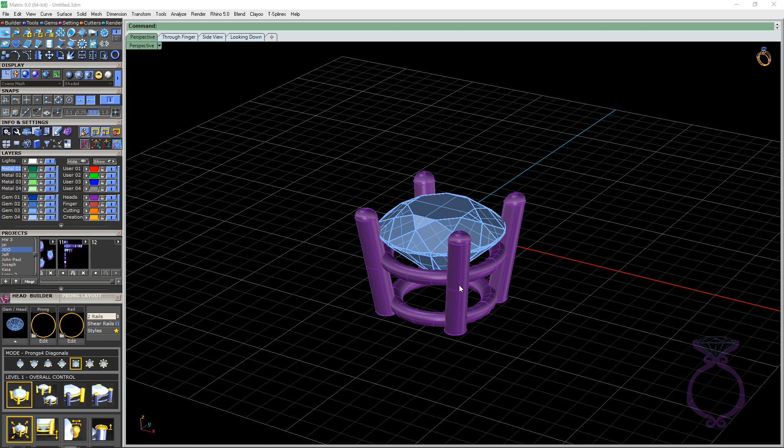So you can see here, part 3, we are going to start talking about head builder. So I've got my 1 carat, and this is basically what the program builds you right away. So if I just go ahead and delete it, and again, I'm going to select the stone, tap F6, and come down to head builder.

Here we go. Now, when we first started developing Matrix, and yes, I was part of the Gemvision team back in 1999, we worked on it for a solid year before we could sell it. So when we first developed Matrix, the programmers always had the prongs or claws come out at 0.6 millimeter. Didn't matter what size of gemstones we had, it always came out at 0.6. And then Gemvision started having roundtable discussions where customers came for a weekend. We showed you what we were working on, and we listened to you and got feedback on what you wanted.

And one of the feedbacks is there's a lot of us that have never worked on the bench that are using Matrix, and we're not quite sure what the thicknesses need to be. So can we increase it? So if it's a larger stone, make them larger. So again, those roundtable discussions were really great back in the day.

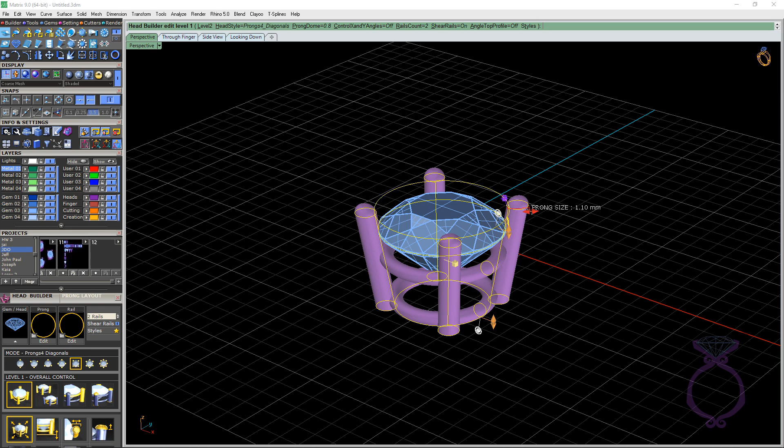So you'll notice here with this 1 carat stone, we've got 1.1 millimeters thickness, and that's a good thickness. And your stone will definitely be secure with that. If you want to make it thinner, by all means you can, but again, just be mindful. You want to make sure that the stone is going to be secure and not fall out. And if you do have clients that are insisting on it being finer, who's going to pay for that stone when it falls out?

And the other thing too with CAD is even my retail customers, they see this looks like the Empire State Building. And if you take out a ruler right now and look at 1 millimeter, it isn't that thick, but it looks heavy here. So again, you're going to have to stress to your clients, this is CAD. It looks larger than it actually is. I mean, there is an option. Let me just press enter. There is an option in view. Sorry about that. So there is an option in view, and it is the zoom 1:1.

So you can click on it. It's very easy to set this up. You actually have to go to zoom. Okay, let me just show you that. Why not while we're here? Okay, if you click on this zoom 1:1 calibrate, you go right now to your drawer and you measure this bar on your laptop or your monitor. You type it in here and hit OK. So let me just bring that back. Control Z will bring it back.

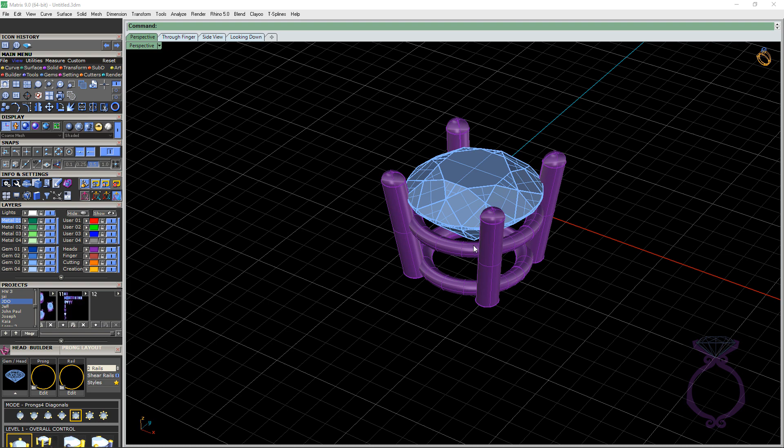So if you need to, if you're working with a client right in front of you, you could do the zoom 1:1 and go, this is how big it really is. So if you're in front of someone, they're going to go, oh, yeah, it's not as big as I thought it was going to be. So unfortunately, that's the drawback. Okay, I'll get off my soapbox here.

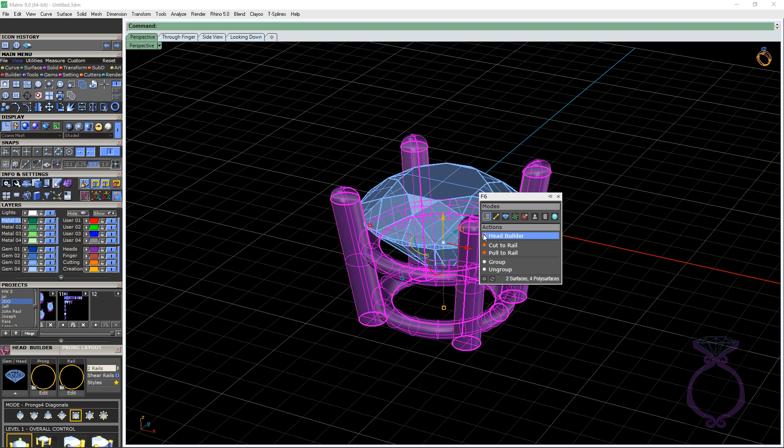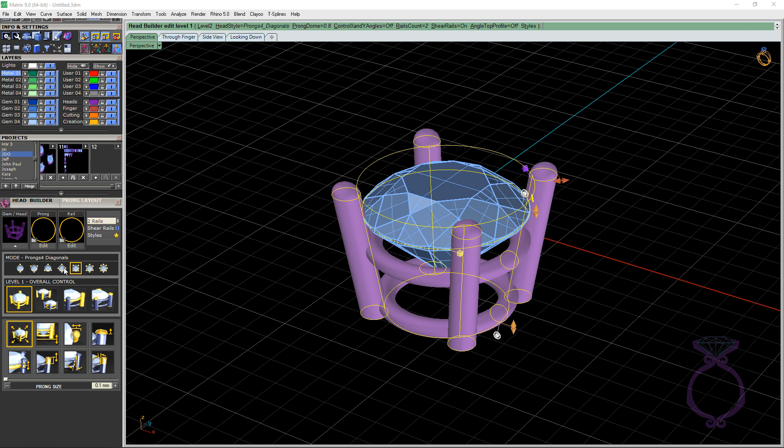So I'm selecting the head, I'm tapping F6, I'm going back to head builder so that I can get these handles to be interactive. Okay, so I'm going to explain head builder, and if you know it, then you can just zoom past this if you want. But right now we are on level 1. You can see here level 1, and there's all these handles. There's also mode, which is the number of prongs that are available with this shape of stone. So if you've got a heart shape or a marquise shape, you're not going to get as many settings. The round seems to have the most amount here.

So if you look at level 1, Danielle, our lady that did all our graphics for our buttons in Matrix, you'll notice that she's got the prongs yellow and the rails yellow, which means that whatever I touch over here, so if I grab this prong size and I increase it, notice the rails are getting increased at the same time. So everybody's working together, okay? So this is level 1.

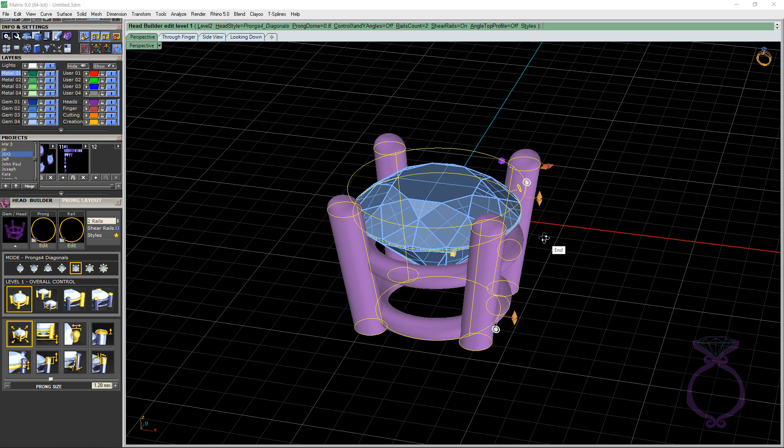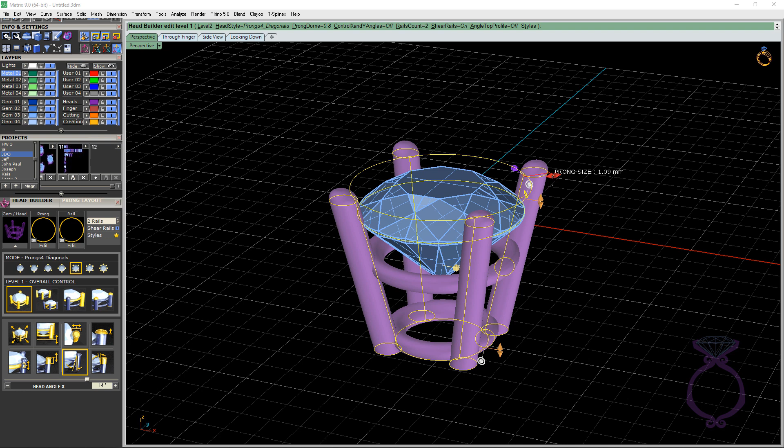Now, when I'm in level 1, depending on my client, some clients want things a little heavier, some want a little finer, but I'm not really going too much smaller than what's coming up as the default with Matrix. But I will go into the through finger viewport, and this is where I can adjust how tall this setting is and what kind of angle. Okay, so that's pretty much all I'm doing in level 1 is adjusting the prong size, adjusting the head drop, and the angle.

There's a couple other features in here. You can also use the top angle. You can pull this in. So if you want your setting to curve a little bit, that's a nice feature, and then you can pull this in. Okay, so that's with your top angle.

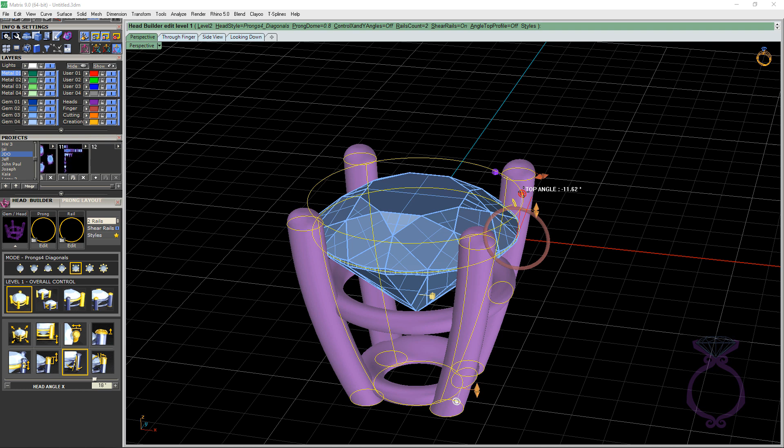Now some people want me to make these claws or prongs very tall, and it's the manufacturers. They want to make sure that I'm giving the setter enough metal to push over, because your customers can say the stone measures 6 millimeters round and whatever depth it is, but depending on the stone, the setter might need that extra metal, and after it's been cast and finished and it goes to the setter, the setter is very cranky that you haven't given them enough length.

So again, you have the option. I only have one client that wants me to make it super tall. Everyone else seems to be okay, but every once in a while you'll get a colored stone, and if you know you're dealing with a colored stone, maybe just increase that just a smidge.

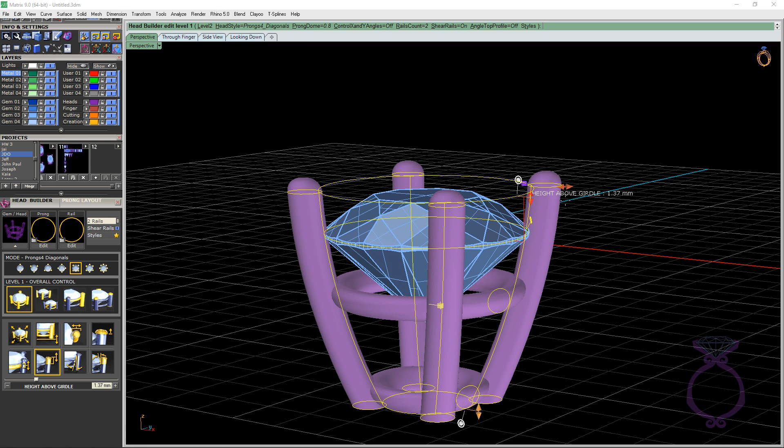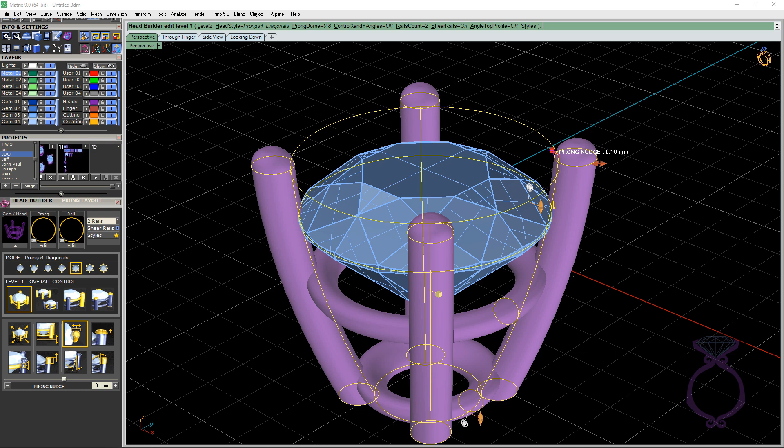There's also a prong nudge, which is 0.1. Now that is the thickness of one single sheet of paper. So if you zoom in here and you're like, oh, that's overlapping too much, remember, this is one sheet of paper. I don't ever mess with this. However, I do have clients that want me to go to 0.3. But for the most part, I don't want the setting too small, and I just leave the prong nudge the default. Okay, that's level 1.

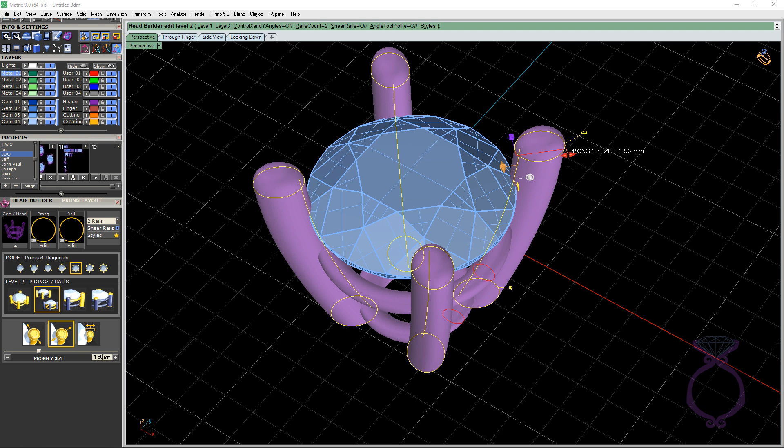Level 2, you'll notice by the picture here that the prongs are separated by the rails. So if you click on the letter P up at the top, now you have these handles. In level 1, if you took the handle and increased it, it would maintain the aspect ratio, meaning that if I scaled it out in this direction, in X it would scale out in the exact same measurement. So with level 2, if you needed to make oval prongs versus round prongs, you have that ability.

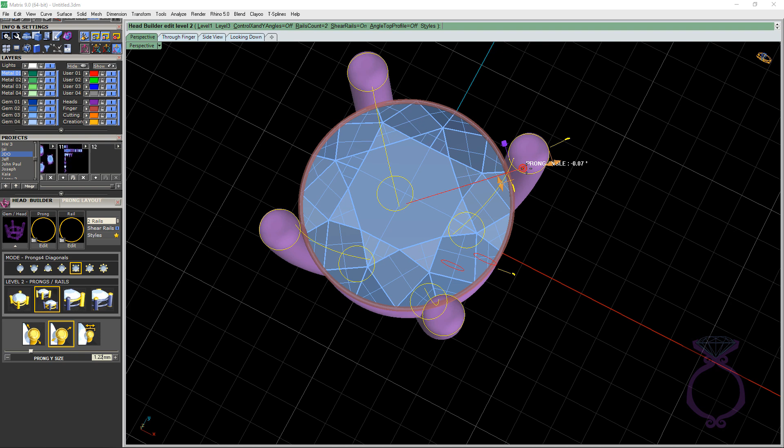The other thing in level 2 is that you can adjust the prong angle. Sometimes I've done this, especially if it's a halo. If I'm making a halo beside this and this prong is overlapping the stone on the halo, I might want to just angle it so that this is in between those two stones.

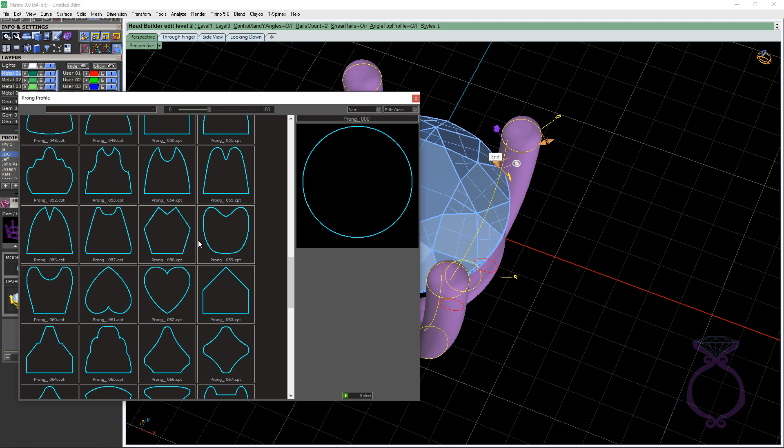There's also the prong profile, so we can go into the library here and choose a different shape of the top of our prongs. Again, the programmers kind of got out of control. They didn't factor in polishing. So unless you're making a simple solitaire and you want to make it just a little bit different, you can mess around with these different shapes. So here's the heart shape. Let's just use the heart shape here.

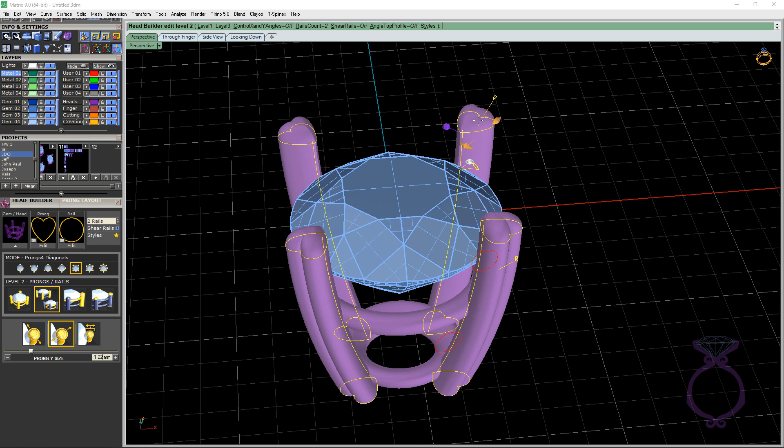The other option, which was also in level 1, is this half bezel icon. So if you click on it, your prongs end up being flat. Let's go back to the circle here. So you can see we've got a nice dome when we're using a different shape, but when we do the half bezel, it flattens it out. And then you've got this V-prong edge angle so that you can adjust the width on this.

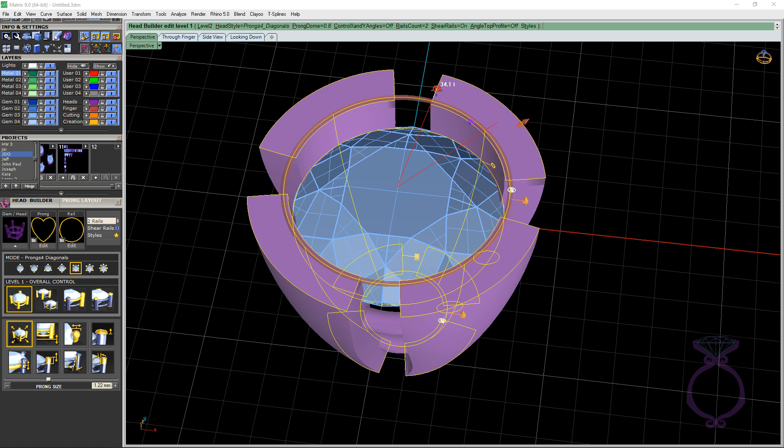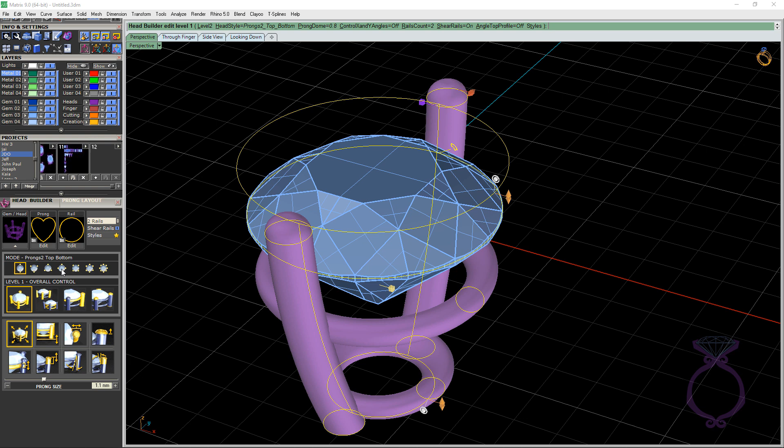So if I went back to level 1, and let me just reset this, you can see now all the prongs work together. Yesterday we were talking about using the bezel cutter to make a half bezel. You can definitely switch to 2 prongs, click on the crescent or the half bezel, and there you go. There's a half bezel, easy peasy for you. So let's go back to our 4 prongs and level 2. Okay, so again, P for prong, R for rail. So we'll just leave these at round.

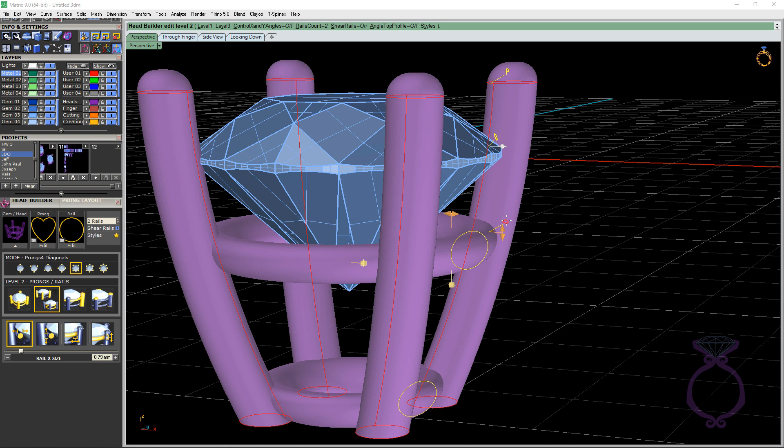Okay, so if I click on R for rail, you can leave these round wire rails if you like, or if we click on the library, I usually choose this rail 4 as my upper gallery rail and hit select. And then I usually increase this to at least 1 millimeter.

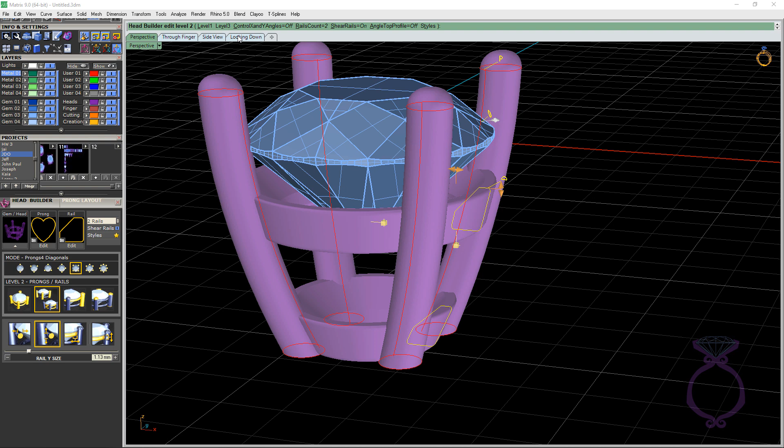Okay, now there is the rail X offset at 0.3, and if we go to the looking down viewport and zoom in, you can see a little bit of that rail just past the gemstone. So be careful with this rail X offset. You still need a connection with the prong and the rail. So what is my, I'm at 0.2. If I bring it into 0, which I normally don't do, see, it's just barely touching.

So as long as it's not peeking through from the top view, I leave it because I want a good connection there. And then here, depending on the size of the stone, I might even pull this out to 1 millimeter. So 1 millimeter tall, 1 millimeter high. But again, this is for 1 carat. On the smaller stones, I might go 0.7 and 0.7 on the inside.

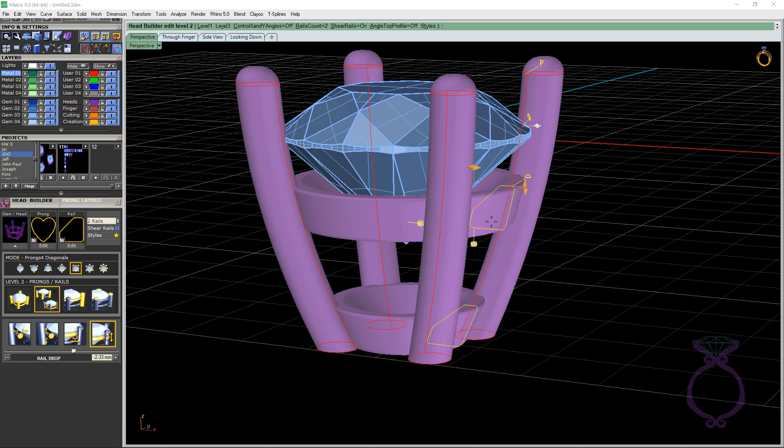Now, there is a rail drop, so this will work independent from the top rail and the bottom rail. So this works independently. And again, you can raise and lower this. And again, if you have a deep bellied stone, you might want to lower it down. And you'll notice that it's the same for the bottom rail as well. That's level 2. Level 3 is where you've got a lot more control.

And if you look at the picture of level 3 here, the 2 rails are separated, and the prong is not necessarily separated from each other. But what is happening in level 3 is that your top of your prong can be different than the bottom of your prong.

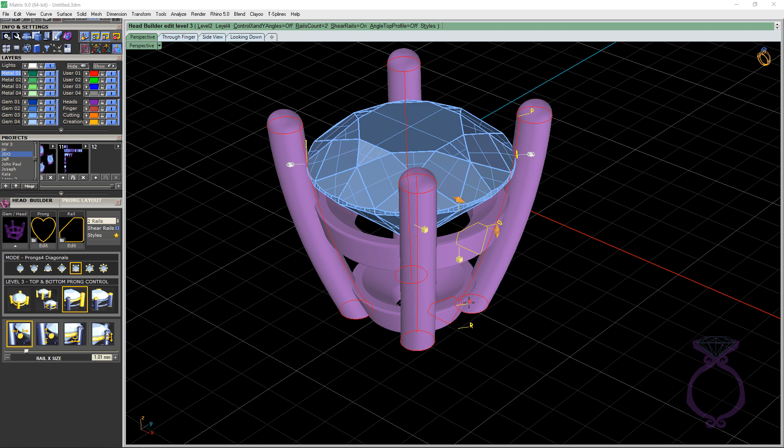So when I was telling you in level 2 where I might move the prongs over so that they're not overlapping the stone with the halo, a lot of times I'll come down here to the bottom prong and actually grab the nudge and pull it in. Okay, and then see the angle of this is different, and it may or may not touch that other gemstone. When we get to Halo Builder, I'll show you my little trick on that.

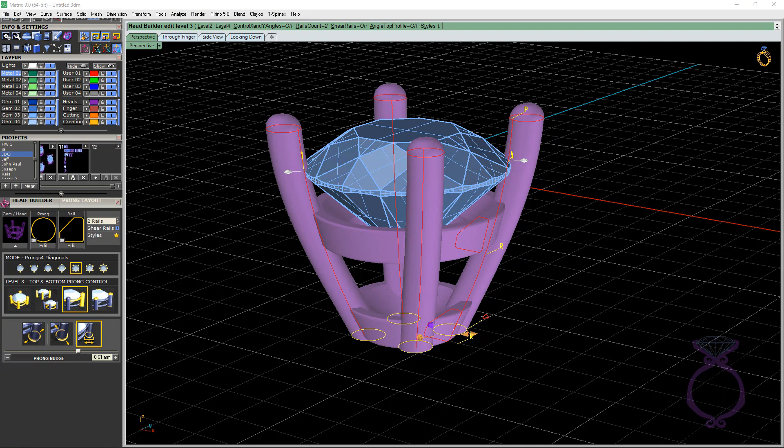Okay, so now when I click on the library or the Taco Bell, I'm sorry, the guy that came up with this whole theory loves Taco Bell, and of course he had to use the bell shape, so that's the story behind that. Lots of little stories working at Gemvision, so there you go. I'm calling it the Taco Bell. He hates that I call it the Taco Bell. It sticks, and there you go.

Oops, and did it change? Oh, sorry. I clicked on the bottom of the prong. So now our prongs are square at the bottom, which is kind of an interesting look, so I'm going to leave that. Sorry, it's the rail that I have to click on. I'm going to change that to rail 3 and hit select.

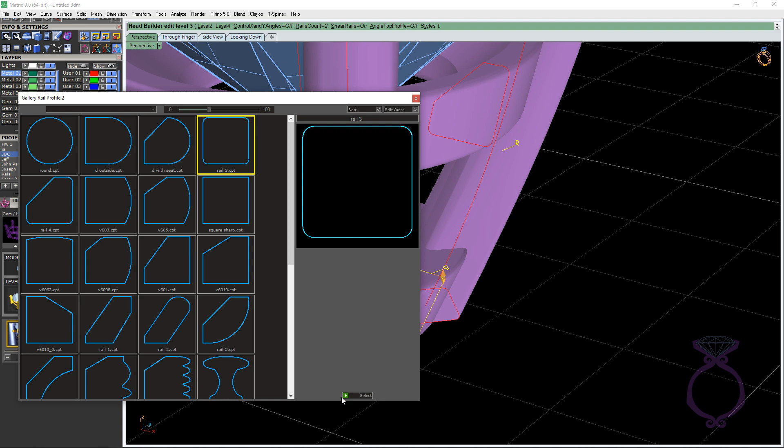Okay, so now before we had this angle here that made room for the pavilion of the stone, and now we can give the setting a little bit more strength by having this as a rectangle versus this rectangle with this angle. And again, it's independent, so if I want to make this heavier.

Now, I've talked to a few jewelers and asked them, is it better to have this gallery thicker than the bottom gallery, or is it better to have the bottom gallery thicker than the top like I have? And when I worked for a manufacturer, we always built our heads this way. If you want to reach out to me and tell me why it would be better to have this heavier and this finer, I'm happy to listen to your opinions on this.

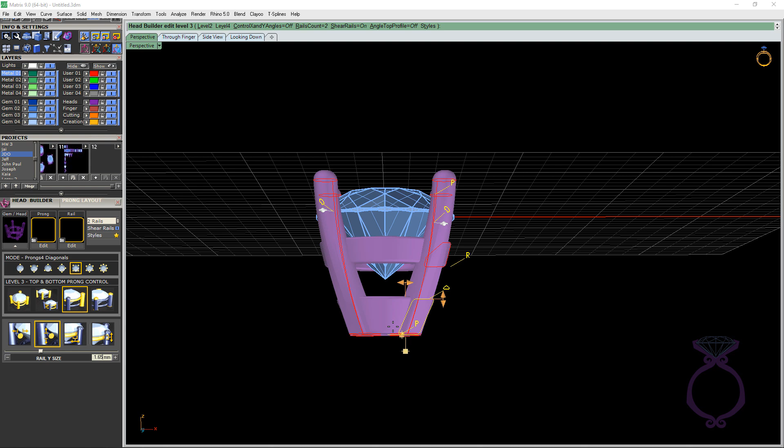But as far as I know, I've always left this heavier because, again, if it's on a ring and you're going to grind it down a little bit when you're cleaning up the inside, then perhaps have this a little heavier. So there you go. That's the theory, and I'm sticking with it.

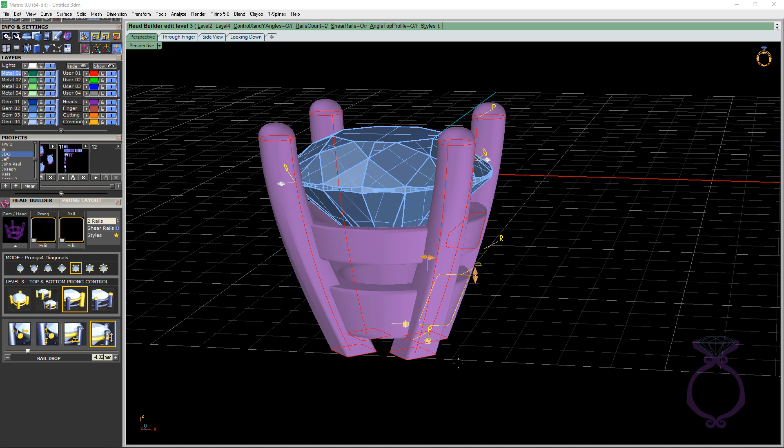Okay. You also have the rail offset in here. There is a rail drop. So if you are making a setting where these bottoms of the prongs have to be embedded in, and you're going to Boolean out a little area where these prongs are going to drop down into a solid piece of gold, you might want to raise this up. Otherwise, we can just keep it at the same height as the bottom of our prongs.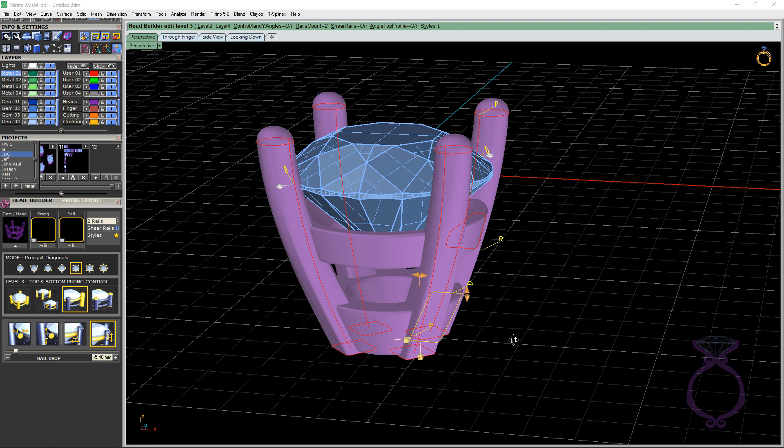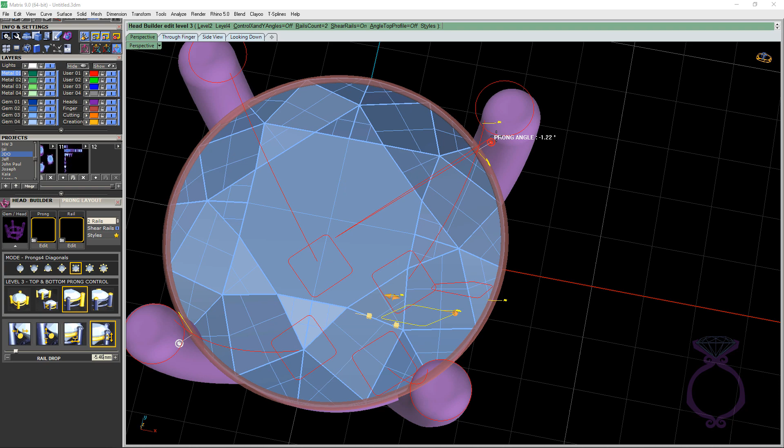Okay, so that's the rails, and again, the prongs, you have a prong angle, and now what happens is that these are separated. So if you're doing a design where you need the prong angles on the top to be different than the prong angles on the bottom, you have that ability. I never had to do that, but you never know what kind of gemstone, like you could be getting a custom cut from something that you bought at the Tucson Gem Show, and that might come in handy at that point. So that's level 3.

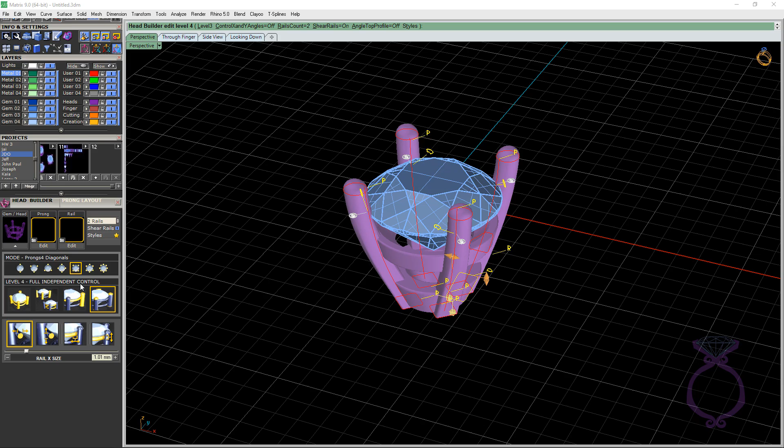Level 4 is full independent control, if you read over here. So that means that every element of this head is separate from each other. I don't really hang out in this too much. Most of the time people want their heads symmetrical. But here's a couple of things that I do in level 4.

Number 1, if you want a true double claw, okay, double prong, if I click on the option of 8 prongs instead of 4, and then hop back. So the moment that you change your number of prongs, it always defaults back to level 1. Let's click on level 4. I can just use the prong angle and scoot these over.

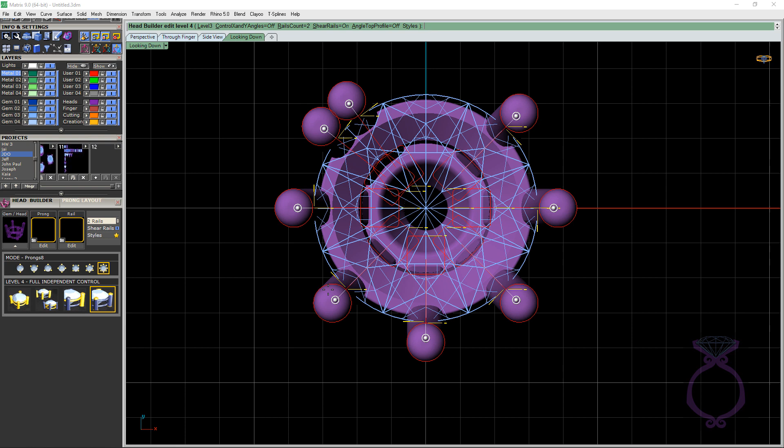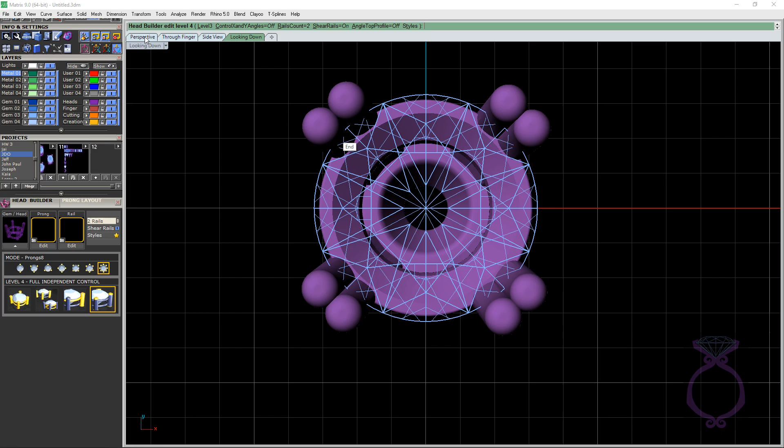Now I'm just eyeballing. I guess I could remember what angles these are at. And most of the time I'll just get 2 looking good together, ungroup them, and then mirror and mirror instead of spending the time individually moving these over, just so that it is symmetrical. But here's a way of making a true double prong by being in level 4.

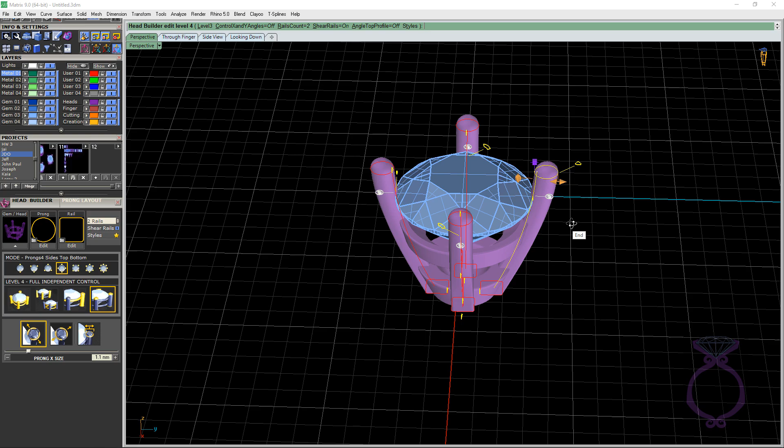Okay, the other option that I've done with level 4 is switching to the north, south, east, west prong mode, going to level 4, clicking on the prong at the top and just scooting it out. Okay, so you could punch a hole in here. Let's go to the bottom here and scoot this one out, and then take the nudge. Okay, so this is very exaggerated, but I could punch a hole through here, put a chain through, and we've got a little pendant. Those are the only 2 things that I do in level 4.

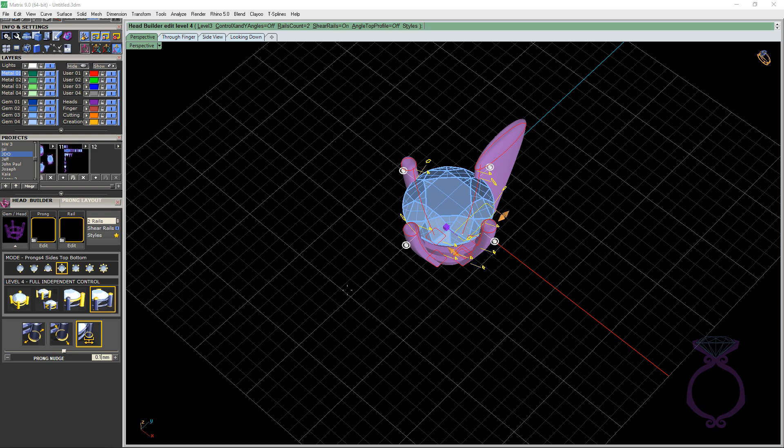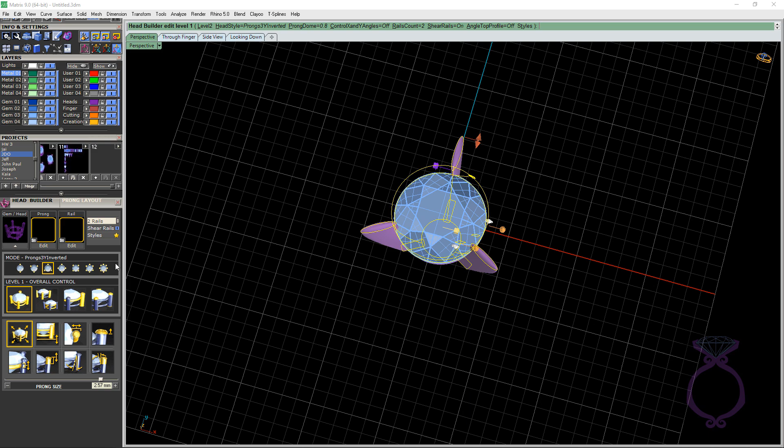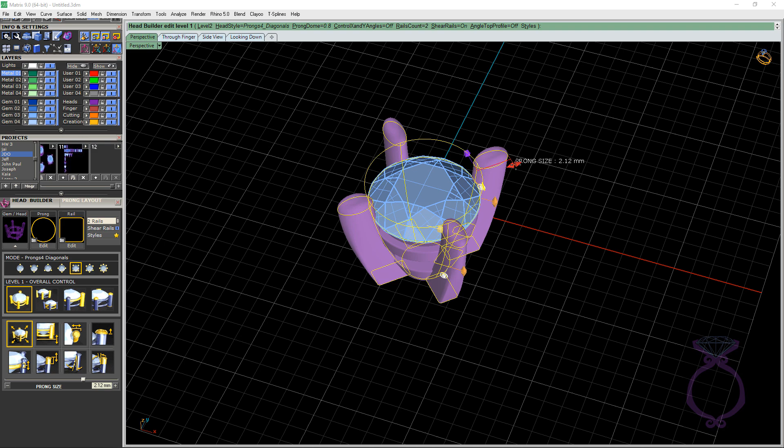So let's go back to level 1, and no, usually, okay, can I switch to another? There we go. Everybody's the same now. Okay. So we're in level 1. There is no reset button unfortunately here. So can I go back to the 4 and let's just get this in. No, I got to go to level 2, sorry, there you go, and then go back to level 1 and there we go. Okay, those are the 4 different levels.

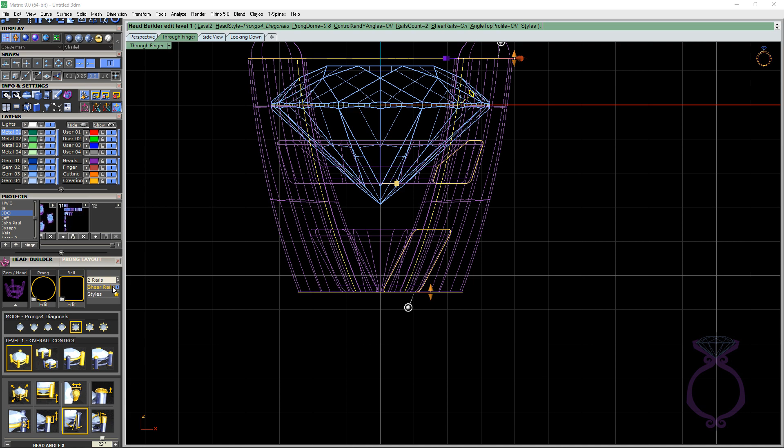The other thing too is Shear Rails. Let's go into the through finger viewport and let's turn the shade mode off. Okay, so there's an option in Rhino called Shear, and basically I call it the Leaning Tower of Pisa. Shearing in Rhino's terms is that it's leaning. Okay, so if you turn this off, then you can get these rails straight up and down, but for the most part, I'm always leaving the shear rails on.

Now, let's go back to display and preview shade. Technically, this is a head that you're not going to be able to order from any findings company. Okay, maybe there is one out there that's like this, but chances are no. But if you really like this head and you want to have it not only for the 1 carat, but you want the 1/2 carat and the 3/4 carat, you can actually save this under styles.

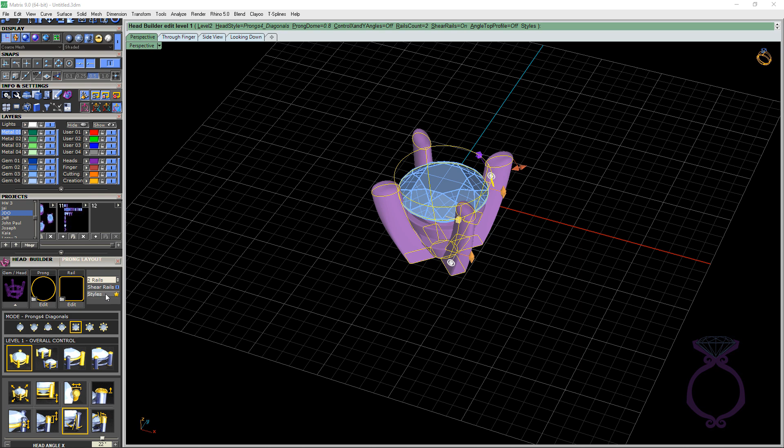So if I click on the little star here, click on add to library, you can name it. I'm just going to call it test. Let's just call it test 3. And then I'll click on save, and then it's down here in our library.

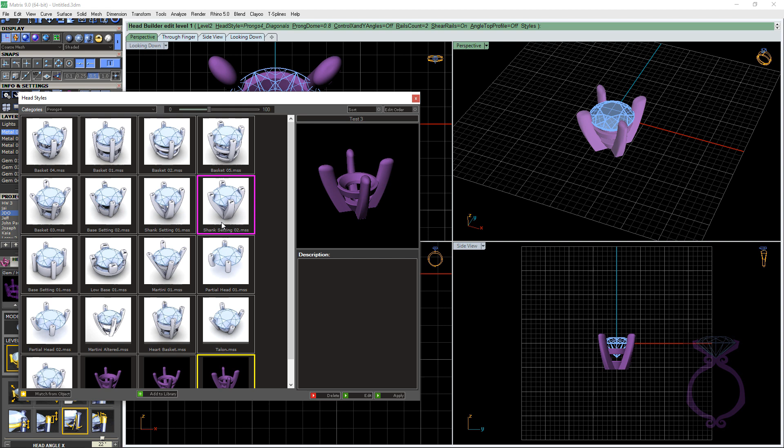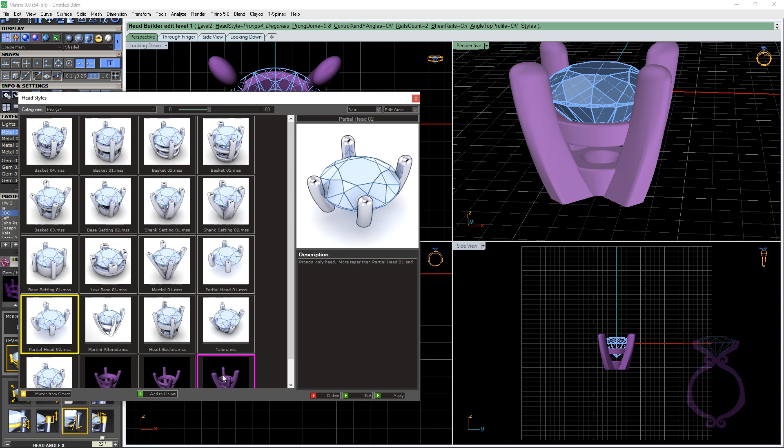Now, there are other settings or heads that come with Matrix. If you don't want to use the standard one, you could just come over here and select it. There you go. Now I can even spin it around here. So instead of spending the whole time going into the different levels to achieve this, you might want to use some of these settings already in the library, or we can go back to the one we chose and just hit apply.

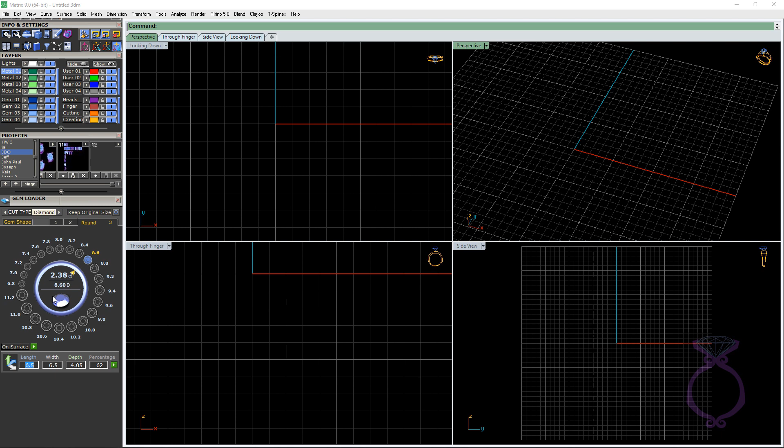Okay, so I'm just going to delete this. Let's go back and grab another gemstone. So that gemstone was a 1 carat, pretty heavy at the base, so what if we went to something larger like a 1.5? There we go. Okay, so we tap F6, go to Head Builder.

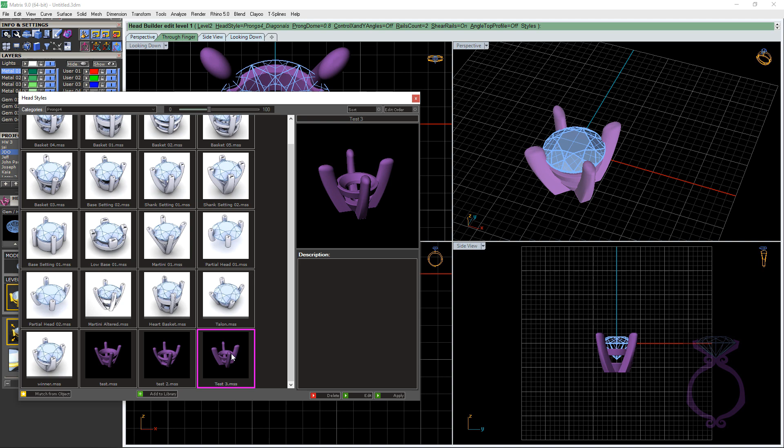And again, all we have to do is go into Styles, pull the elevator down here, click on our setting, and hit apply. So if you design something and really like it, but want the ability to use it on different size gemstones, that's how you can save it, and then you don't have to keep recreating the same setting. So that's Head Builder.

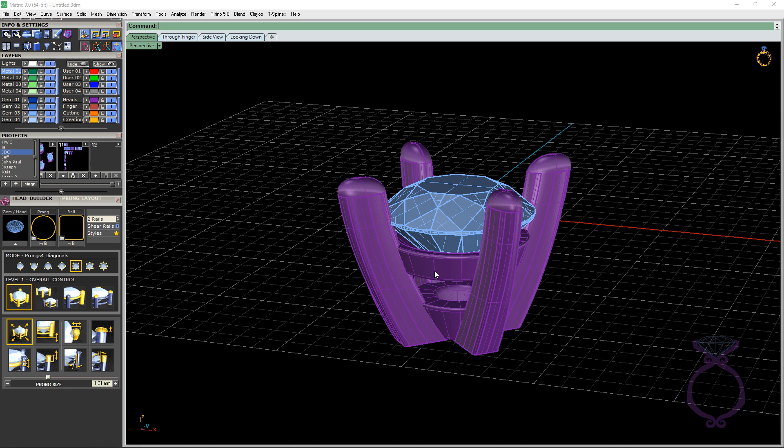All I can say is if you stick with the defaults - but again, I am making these rails heavier and changing the shape. I always like this look versus the round wire, but again, I do have customers that like that round wire effect because it looks finer than this flat style.

So the other thing that I wanted to talk about, and I mentioned it in another video, is match attributes. So let me just pause the video for a second and I'll be back momentarily.

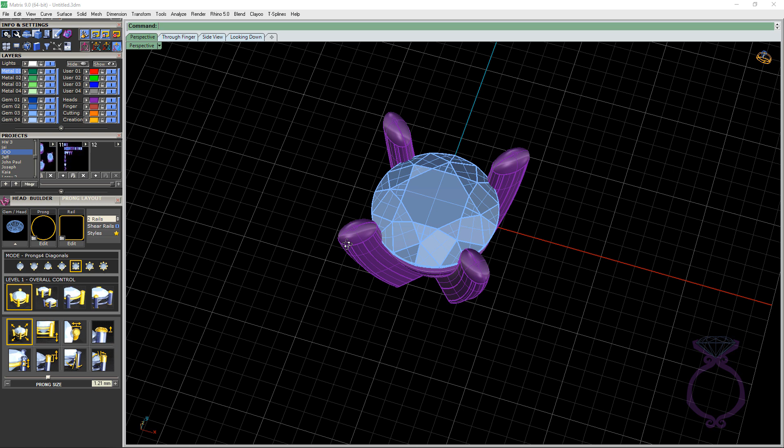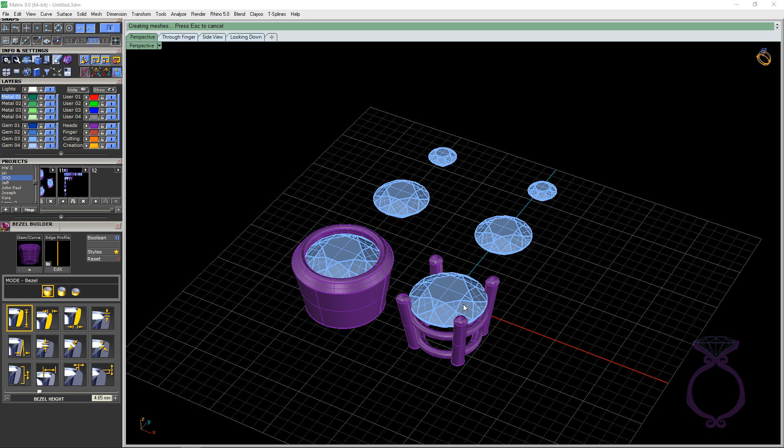Okay, we're back. So with match attributes, we saw in another video that these stones have history, and I was able to bring back a bezel, a plain bezel, when we were doing bezel cutter. So if I select these 2 stones, tap F6, and go to match attributes, up at the top it says select objects to take the style sheet from. So the style sheet is actually the head and the object is the stone. If I click on the stone, it's going to ask what do you want to match. Well, the only choice we have is a head. Let's hit create.

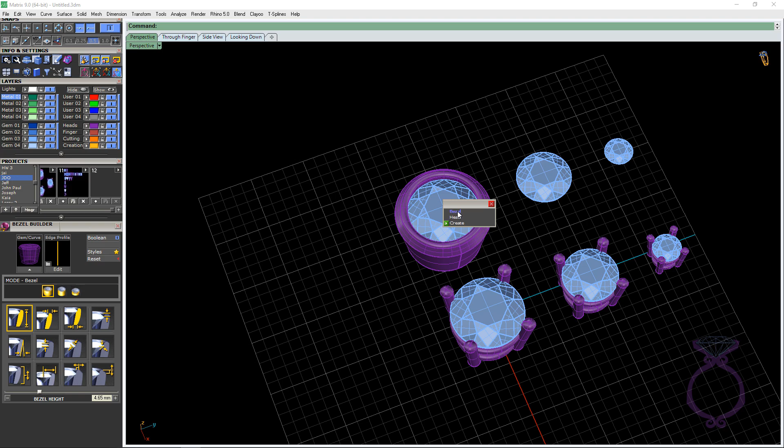And so there it comes out in the different sizes, and again, these guys are scaled down based on the size of the gemstone. Same thing with Bezel - I'm going to select the other two stones. Same thing with Bezel Builder: match attributes, select the stone, bezel, and create.

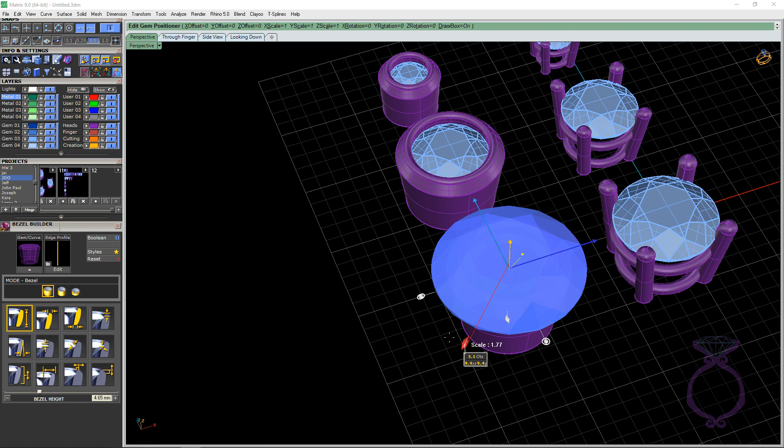The cool thing about Bezel matching attributes is if I select this stone and go to MSR, which stands for Move, Scale, Rotate, we'll click on that. And if I scale the stone down and press Enter, notice that the bezel will get updated as well. So I can make it smaller and I can make it larger.

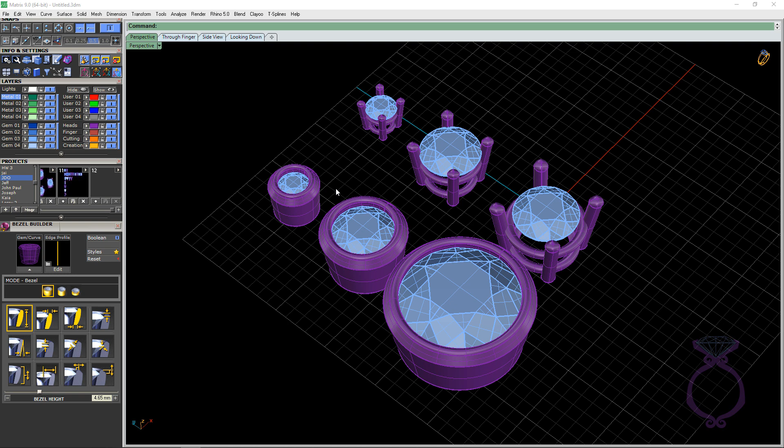But however, with Head Builder, if I go to MSR and scale it down, it doesn't update itself. So that's the cool thing about Bezel Builder, and it's not even just with match attributes - it's any bezel where if you decide you need to increase the stone size, press enter, and you don't have to go back to the drawing board and remake that bezel. Okay, that's a little bit about match attributes.

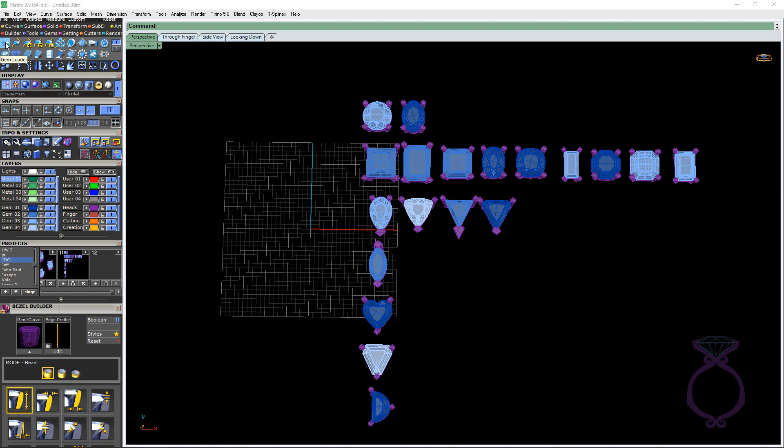So that was using match attributes with the same shape of stones. You'll notice here, here's all the gemstones available in the gem library. So if we go to the gem loader, if we click on gem shape, here is the entire library that we have.

I do have to tell you another story - this calf cut exists in Matrix because it was the very first stone I built in Matrix. They asked me when we were working on Matrix to build stones. So Jeff, the owner of the company, made the first round stone, and I think he was bored right after that. I didn't build all of these, but the calf cut was my original one. Jeff said, do not make the baguette - that's too easy, I want you to pick something else. And I'm technically from Alberta, Canada, and calf cut... you know, Stampede, Calgary Stampede.

Sorry, I'm losing it here. But anyways, that's why the calf cut exists. It's not a popular stone shape at all, but I always think that even though I only worked on version 1 of Matrix, helping out the programmers, there's still a little of me living in the program. So there you go - now you know the story of the calf cut.

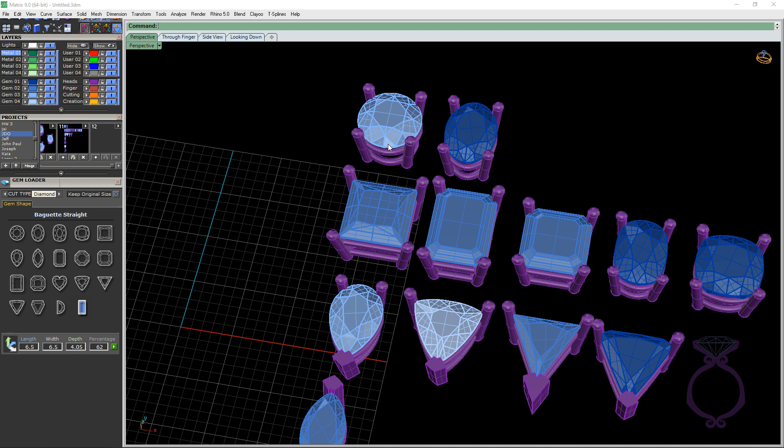If you look at the different shapes and the way I have it lined up, if you make a round stone, there's going to be some ovals in that piece of jewelry as well. Technically you don't have to rebuild the head for the oval. Let me show you: select the stone, tap F6, Match Attributes, select the gemstone, choose head, and create.

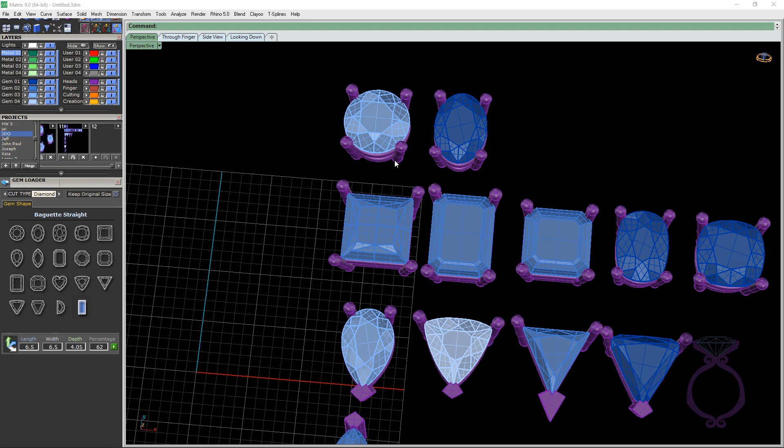The geometry of the circle and the round are pretty close. This worked great with a 4-claw. My theory may be wrong in certain cases, but for the most part it's really great if you're doing a 3-stone setting with 2 ovals on either side of the round. You can use Match Attributes.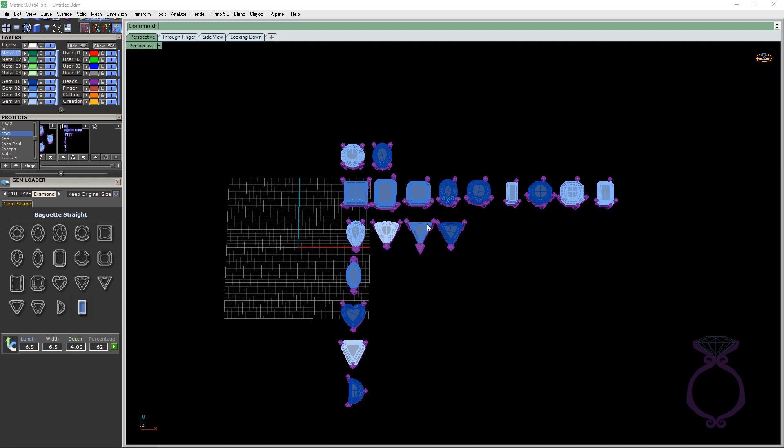With the princess cut, if I was to delete these and select all of these, tap F6, go to Match Attributes, and go with the round, let's see what we get. See, it's chaos. It's not happy because the geometry of a square is different than the round.

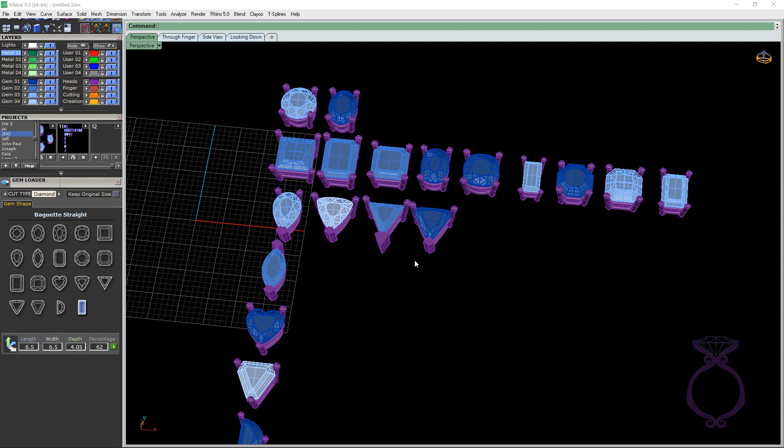However, if I select these stones, tap F6, go back to Match Attributes, select the princess cut head, and create, there you go. So these guys are alone because they do not play well with others.

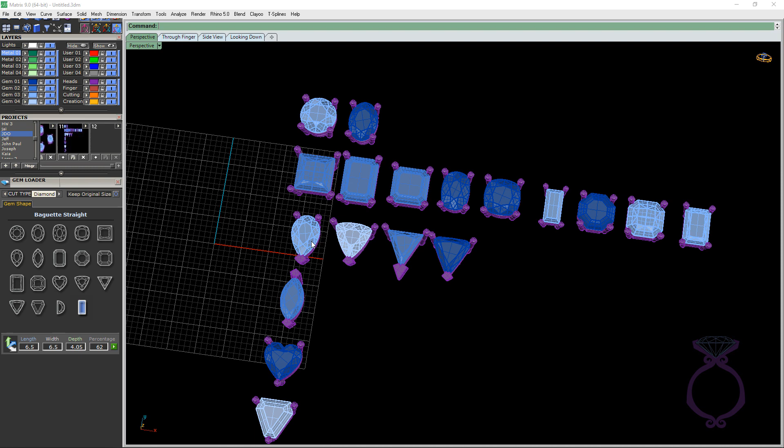The pear shapes, the trilliant, and this sort of radiant cut trilliant - what did they call it over here - trillion straight, okay, that's what they're calling it. These guys play well together. The marquise does not. The heart shape does not play very well with these, even though technically it's sort of the same shape.

But if I select it, tap F6, go to Match Attributes, select the pear shape, and go to Head, this is what happens. But technically you have a setting on there that has the same size as these. I chose these shapes so that they are relatively the same stone size.

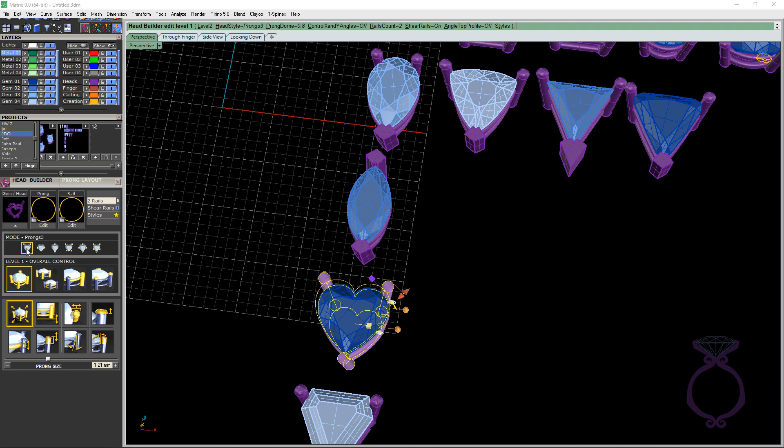But if I select this, tap F6, go to Head Builder, here's the workaround: choose the 4 claw and then go back to the 3 prong. So technically the only change is that I would have to mess around.

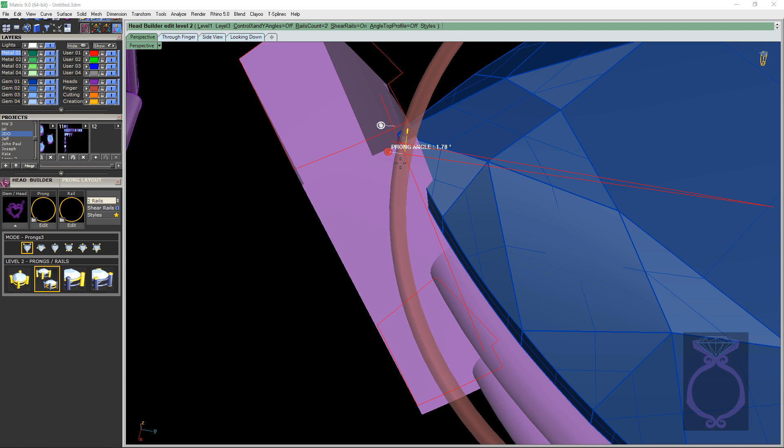Is it level 2? Yeah, level 2. I could go in here and put a... oops, yeah, prong angle. Nope, not prong angle, sorry. That's just scoot - see, notice it's sliding it around, and I don't want that. I want it on either side. It's this guy here. There we go.

Okay, and then I probably have to go to level 3. Oops. No, it wouldn't even be level 3, it would have to be level 4.

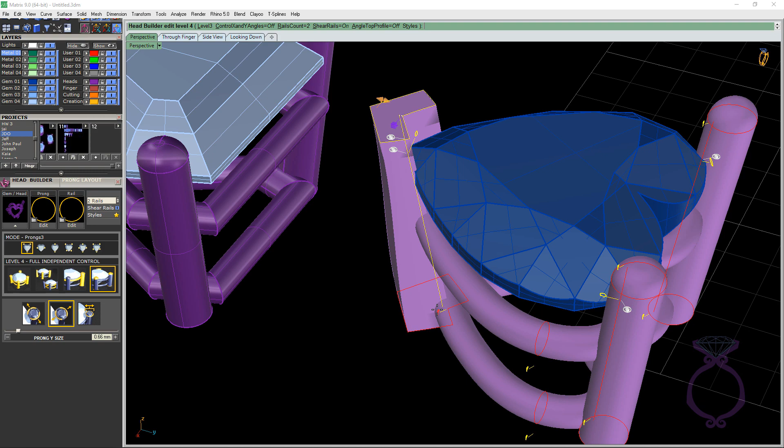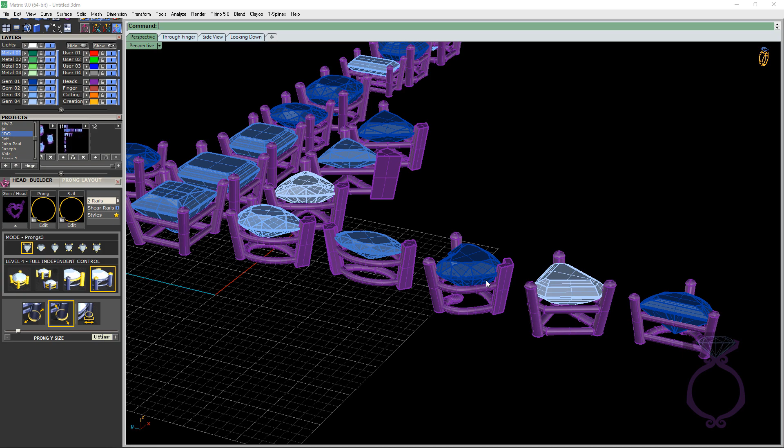And come in here. So even though I was showing you the different levels, that only pertains to the round gemstone. As you change the shape and the different modes or prong layouts, it may not work the same way in the different levels as it does with the round. But did it save me any more time? I'm not sure by messing around with that.

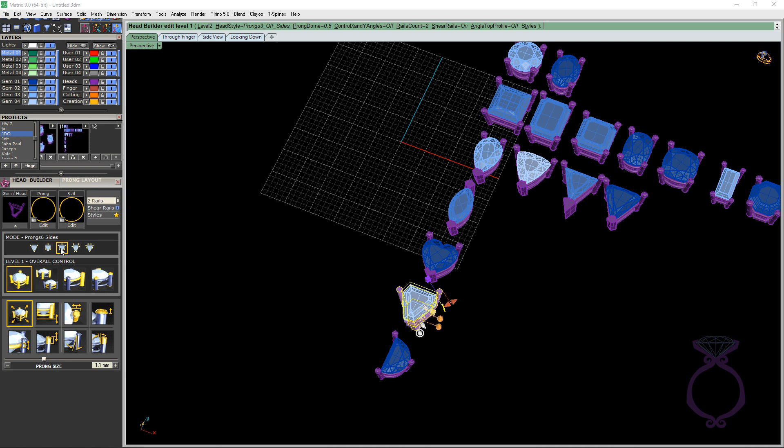And the same thing with the half cut. Here's the interesting thing with the half cut: let's just go to Match Attributes, the heart shape, and create. Again, total madness. But we'll go back to Head Builder and see if this is going to work - there we go.

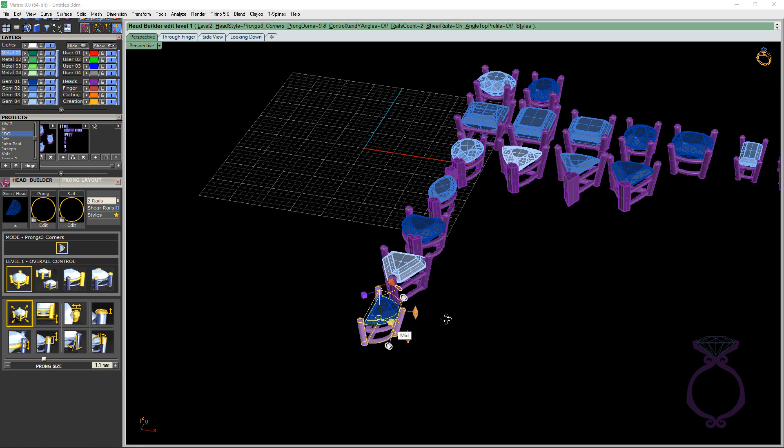Now, interesting about the half moon shape - we can't even do Match Attributes with this. If I select it and Match Attributes, it doesn't matter what stone I pick, it's not even going to try. So this is the Lone Ranger. You just have to use Head Builder, and you can't try to save time by applying a head of a different shaped stone to this, even if you're adjusting the prongs and rails and don't want to spend that extra time.

So that's Match Attributes. Hopefully this was not a waste of time, that I did show a couple little things you didn't know about with Matrix. But again, they had to divide up Head Builder into 4 different levels so that we can get the setting looking the way you want it to be. So that is Head Builder and Match Attributes.